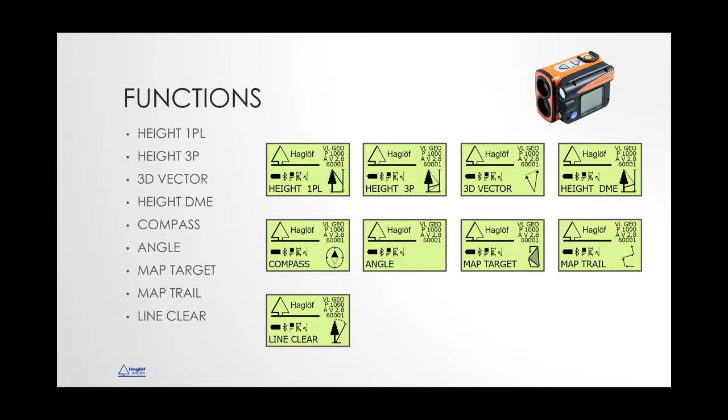Then we have the line clear function, and line clear is for the power line business, to know if a tree will fall on the power line or not. And then we have the delta height, and that is to know the straight line between two poles down to the maximum sag of the line. And these functions, the line clear and delta height, have also been in a special presentation before this.

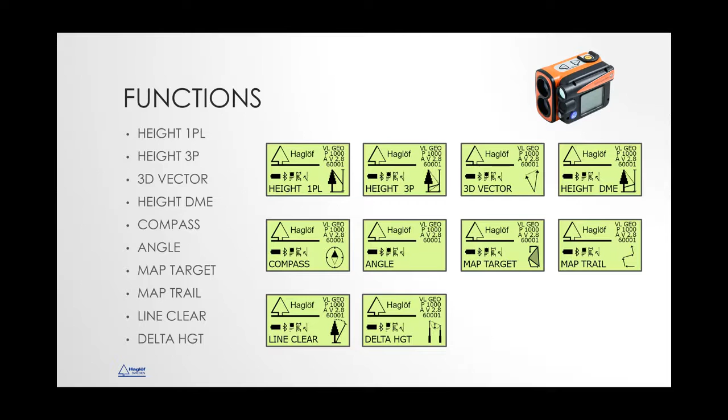So to explain a little bit before we go into the method, I want to mention how we have done in the background of this project, how to measure irregular piles of wood chip or gravel or anything like that, because it's very hard to measure. There are a lot of different things that the result depends on. And we started already 10 years ago a project with a customer of ours here in Sweden to try to get the volume of these irregular shaped wood chip piles with better accuracy and consistency.

But at the time when we started these tests, there weren't many good options, and many of the hardware solutions that were available for us to use weren't that reliable, and it was always about connecting different instruments to each other and so on, and we ran into quite many problems. But at that time we also made a project of measuring bigger piles of roundwood. So that's how that project also started. We have a solution for that as well.

But when we introduced the Vertex Laser and the Laser Geo in late 2017, that was at Elmia. After that, late 2017, 2018, we went back to the customer and asked if they were interested in a project trying again to find a way of measuring these irregular piles. And we started a project together with them, and we bought a drone as reference data, because we needed to know the result of the measurements to be able to compare.

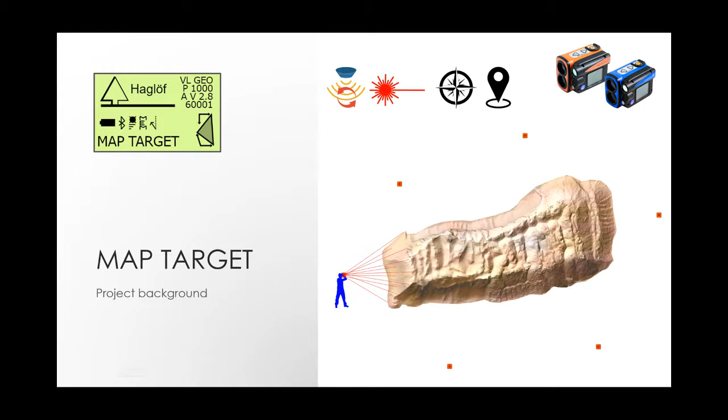Okay, so the method that we finally came up with after, I think it was about 6 months, was verified by our customer, the independent control measuring organization here in Sweden that measures all the timber at the industry. And what we found out first was that any compass should be tested, because a compass gets problems if you have metallic objects in the ground, or if you have your cell phone nearby in the pocket, or car keys or something like that.

And our compass can be calibrated, of course, and you can also set in the unit the magnetic declination for the area where you are. But we don't recommend just calibrating the compass, because we do a factory calibration here. It might be something else that is wrong with the unit.

So you see there also, in this project we have our own non-magnetic monopod. So we know that this is very important: if you use just any monopod, for example, there might be problems since the monopod itself is disturbing the compass. But the monopod we supply with the unit is non-magnetic.

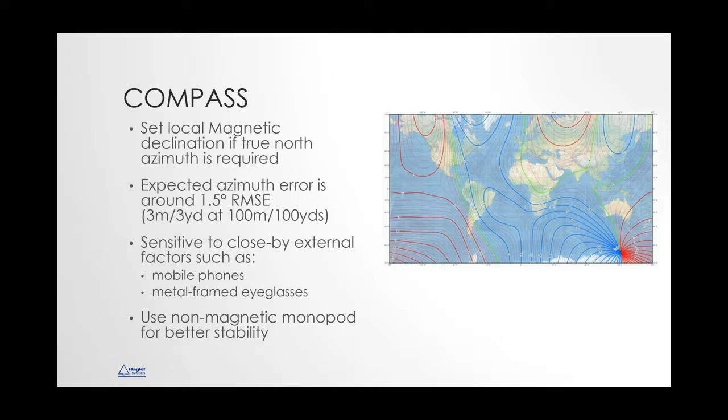But we developed a test function for the compass, and this just tests the accuracy of the compass at the position where you are. So how that works is that you measure in one direction to a clear target. You go to the test function in the settings menu, and you measure. And then you go to your target and you measure in reverse. And you should be, as it says in the presentation, 180 degrees plus minus 4 degrees.

Then you can say that, okay, the conditions to measure where I am are good enough. Then you don't risk that you do all the measurement and the data is crap. So this is an important thing that we found out. And you can also do these tests because it's very fast to do them. So you can do it a couple of times.

And how this method works then: first you come to the area, you test the compass, then you start planning your inventory, how you would like to perform it. If you see the pile here, you take a walk around and you see where you have to put your reference points. And I plan in sections.

So a section should not be wider than 90 degrees from my reference point. And I need to see my next reference point from the one where I'm standing. So these are the conditions for the planning. And then I just put out as many reference points as I need.

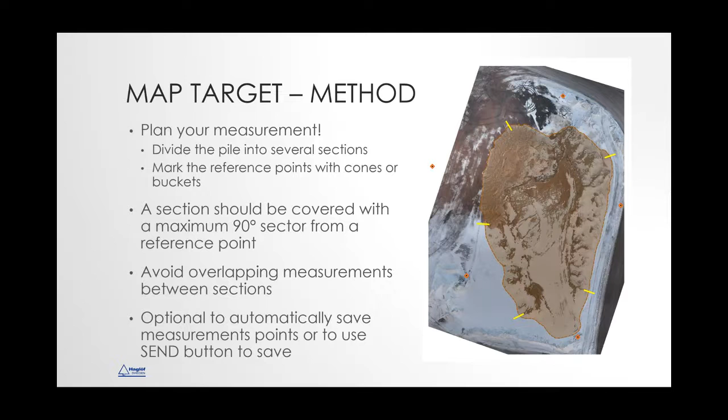So you put the cones out where you want to have your reference points and where you best can cover the target, and then you can start your measurement. So now I am at my starting point, my first reference point. And when I take my first measurement, this is the method that we found out from a lot of testing, was to start from left to right and to measure base points first.

So when I start the instrument and I want to start to measure, I will first aim on the left side of this section. You see the yellow line on the left where it goes down, that's to mark where the section starts. I will measure my first point, but then the instrument will prompt for a GPS position of my location. And this is only at the first reference point.

On the other reference point, it doesn't need a GPS position, and the unit actually doesn't need a GPS position at all to get the volume. This is just to show on a map where is the pile, but the volume will be the same no matter where in the world it is. So this is how it goes.

I measure, and it auto saves my measurements, and we say like 6 to 10 points, depending on how irregular the pile is. Then I aim about half a meter up, and I do my second line of points. And this is a kind of security line that we came up with in the method as well, because if I didn't take this point, we risk with the method to overestimate the volume, because actually the calculation that we use is called the nearest grid. It's a quite advanced mathematic form to calculate volume of irregular objects.

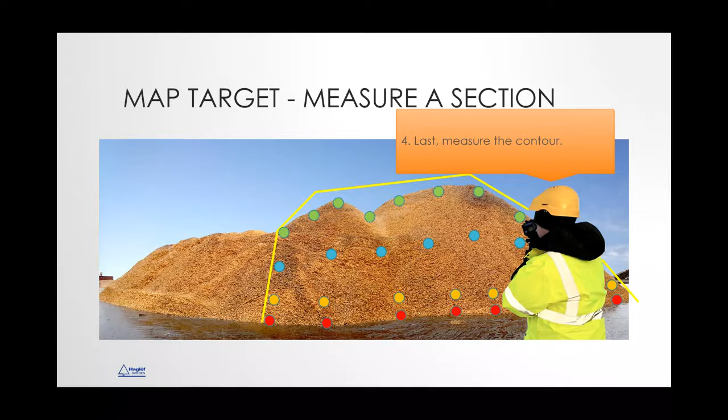Okay, so this shows measuring the section. And now you see to the left, you have your next reference point. I have told the unit new reference, and then I measure on the reference point, and we suggest to measure and get the same result 3 times for the distance, because you might risk to miss and hit the target behind, or it could be a car standing nearby that you hit or something.

And if you move to the wrong position, of course the data will not be correct. So I measure and I walk to the second reference point, and it's important to stand exactly on the point. So you move the cone and you stand exactly straight where you were measuring. And then you measure your third point. The same.

And the last reference point, cover with base points, and then the points on the pile, describing it as well as you can. And then finally you measure back to your starting point. And then when you press escape, you will tell the instrument that now I'm ready with the measurement.

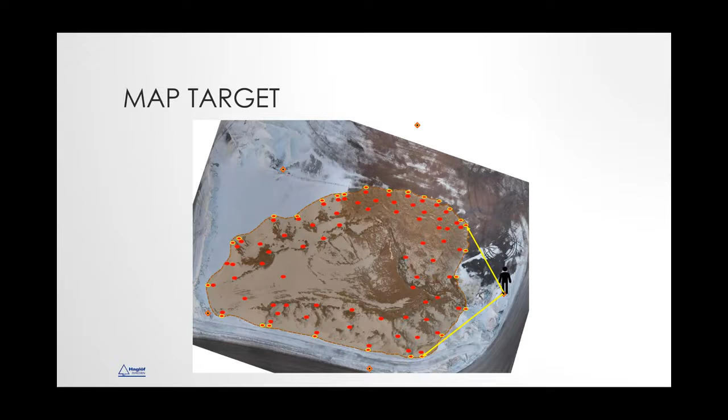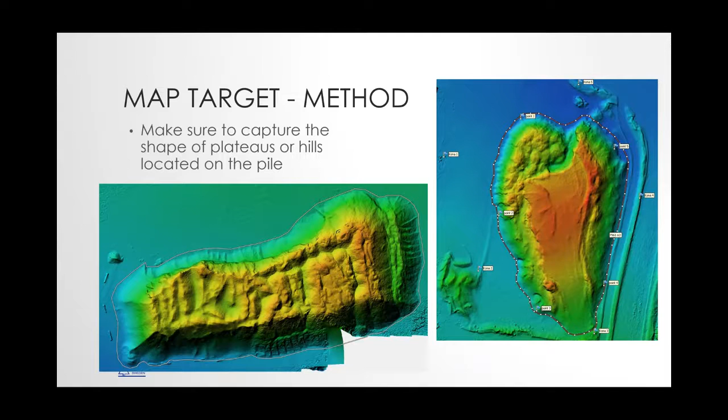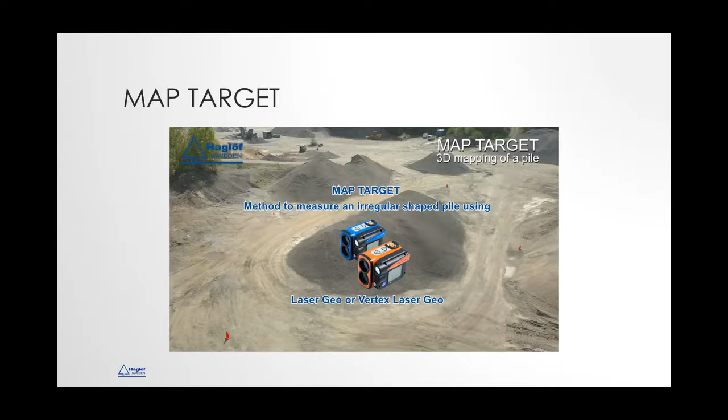And the pile you see to the right there is the one that was described in the data before with the drone image. You can see that the machine has been driving on the pile as well. Okay, so this was describing the method, how you should work, and it's important that you follow this left to right and so on. I was going to show a small movie about everything that I spoke about now to get a better view of what I was talking about.

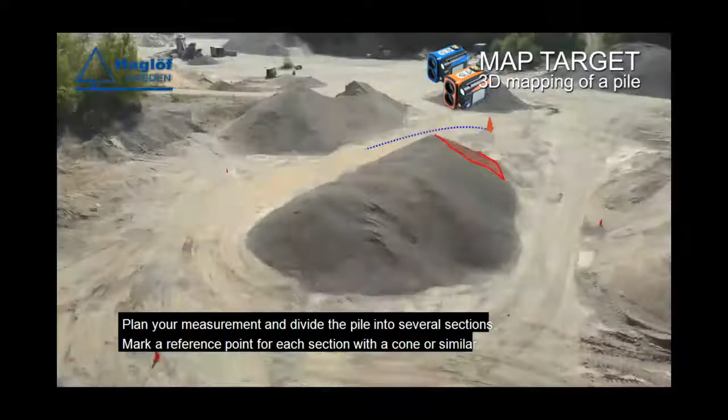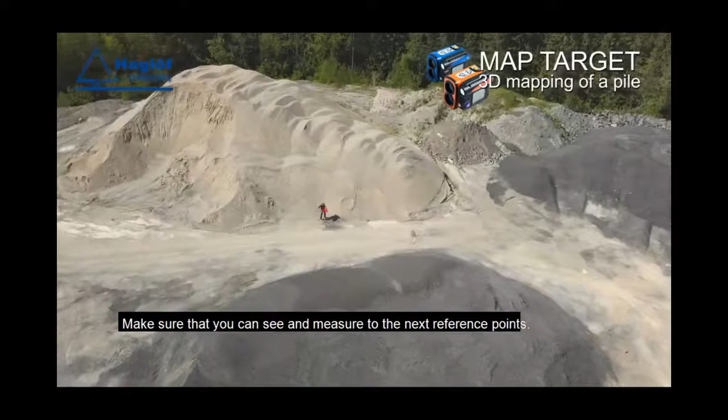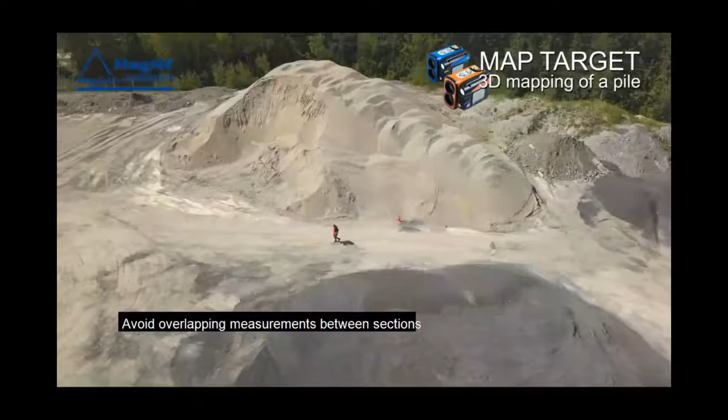Okay, so now the compass has been tested already to know that there were no conditions in the ground or concrete or something that disturbs the compass. I go out and start planning my inventory, putting the sections out so that you don't cover more than 90 degrees. You must see the next reference point from the one where you're standing. So that is also important.

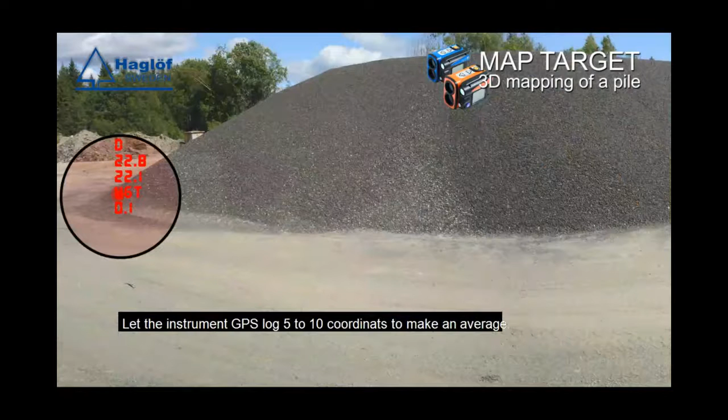And it's also something to think about, not trying to overlap. So what you cover from one reference point, you shouldn't cover from the next reference point. So now you're at the first point, measuring, starting to the left and measuring the first point, and it starts the GPS automatically and starts to log, and you see the number of positions and how many satellites are found. And then when you're satisfied with the data, you press to store the first point and your position. And remember, this position is only important to create the KML file.

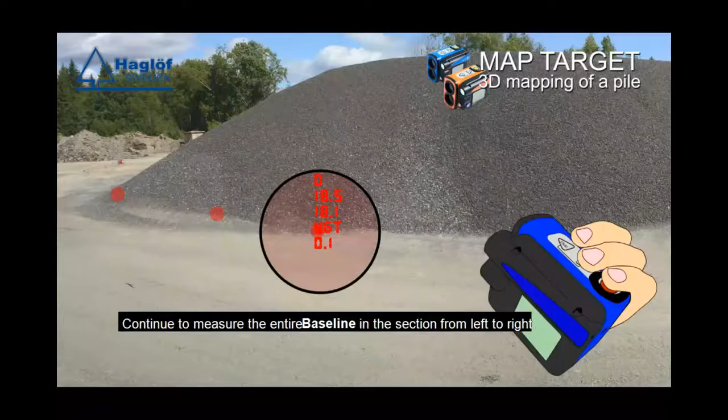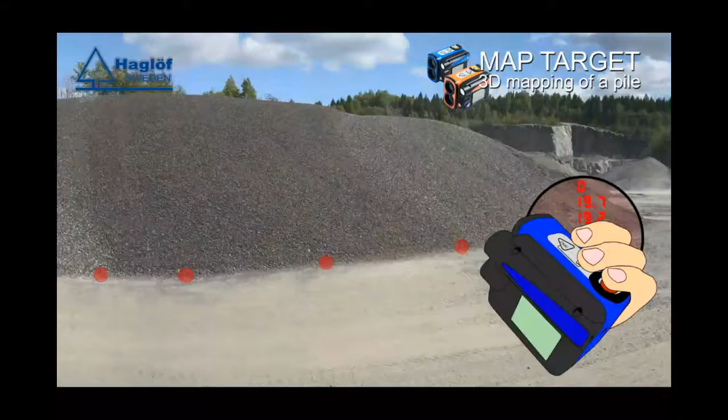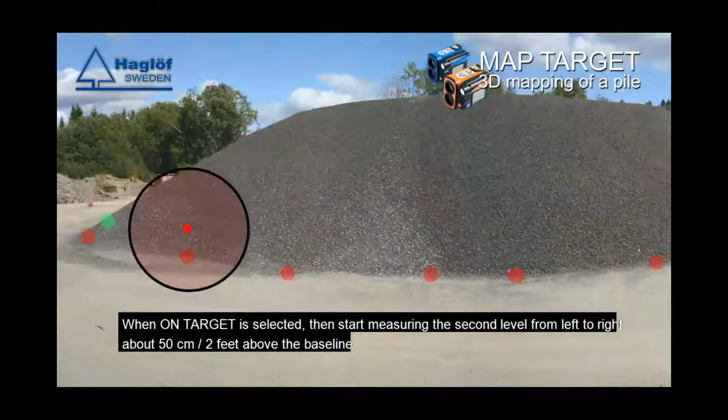Then you measure and autosave base points. And it goes very fast and smooth, and depending on how irregular the pile is, you should take more or less points. Then you press escape to tell the unit that now I'm no longer measuring base points, I'm starting with my points on the pile. And this is because it should calculate the base area from the base points.

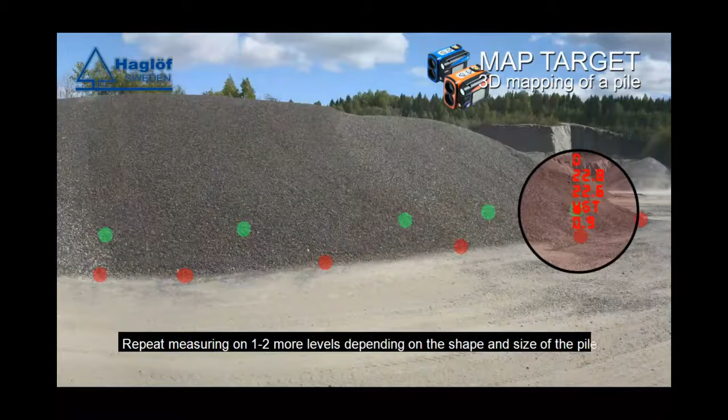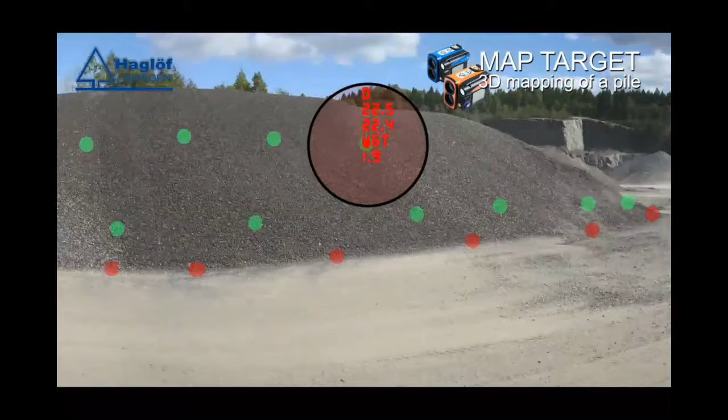So you measure your security line at about ½ meter. It's not important that it's exactly ½ meter. It could be anything nearby there, but about ½ meter. And in this case, a third line, where the pile changes, and then the top contour is measured. You see the result in the scope all the time.

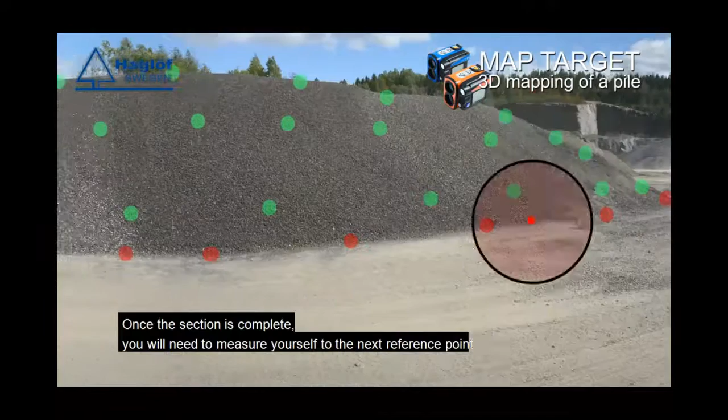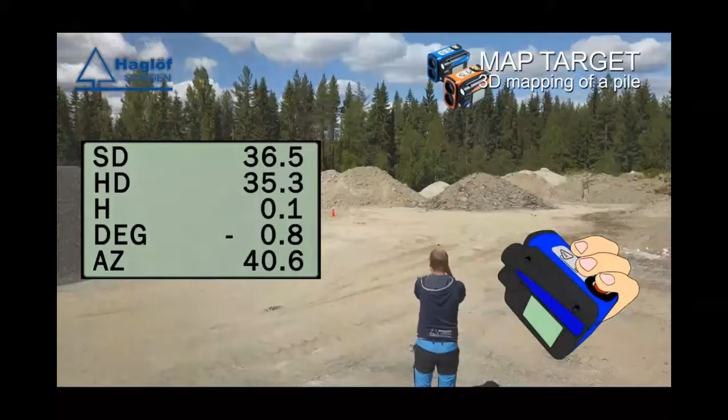Now the section is ready, so you should move to the next reference point. But first you press escape to tell the unit that now I am ready with my reference point. Aim at the second reference point and repeat 3 times the result, aiming at the base of the target. Here it's important if you're, for example, 2 persons and 1 person is the target, then you should aim at the feet and not high up on the shoulders or something, because that will actually destroy the data.

Then you would need to stand on the shoulders of a person on the second. We did that at one of the testings. We had customers that used each other as targets, and that is not recommended. So always shoot at the feet.

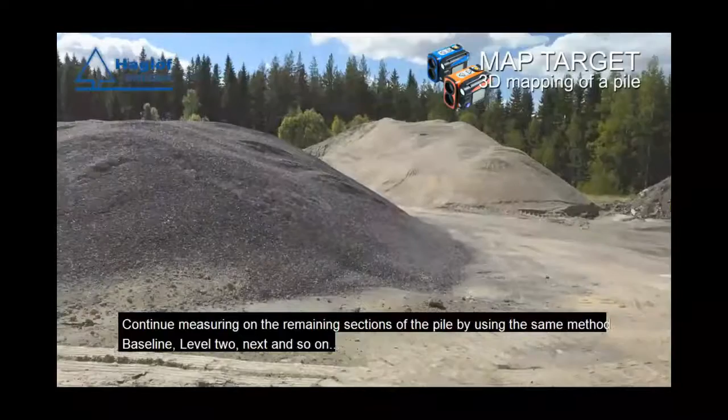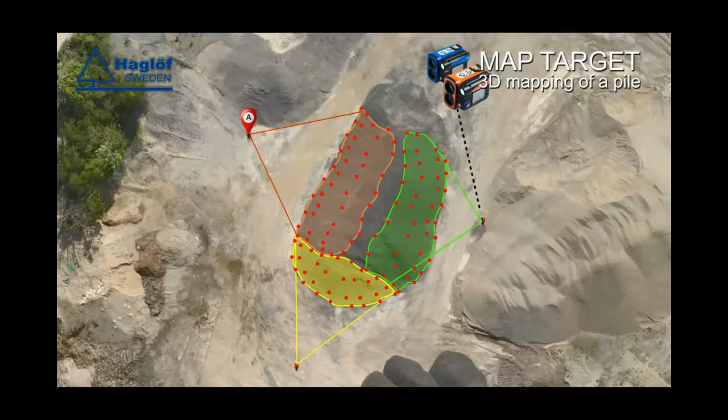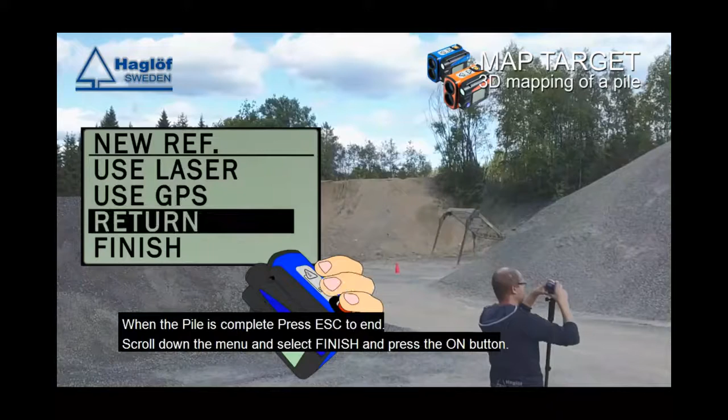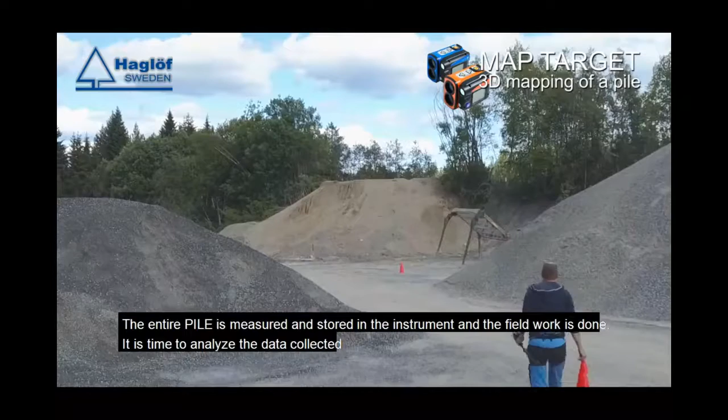So I am at my second reference point. I measure from left to right, not covering more than 90 degrees, and I try not to overlap. Measure my second point, my third point, and so on, until I have covered everything. And then in the end, I measure back to my starting point, my first reference point. And then I escape and go to finish. And now I'm ready with my measurements. So now I have all the data stored in the Geo for this pile.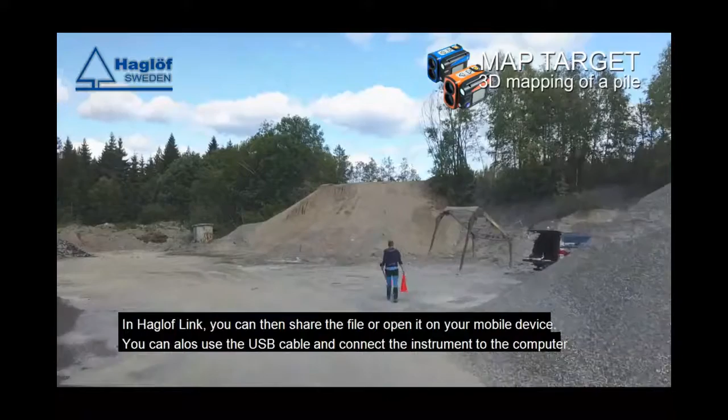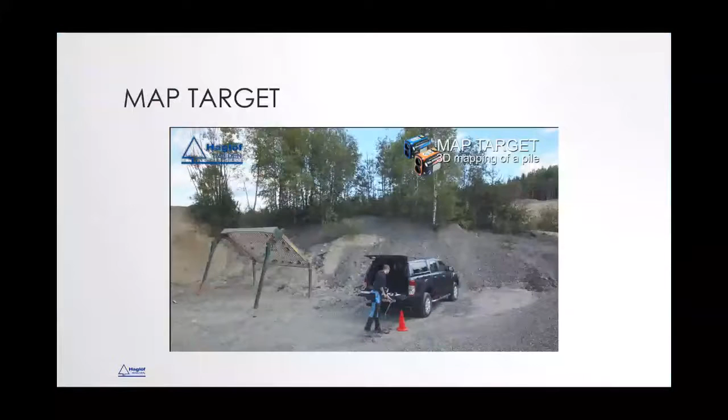To see the result now, I can see it actually, and this is what I talked about earlier in the project. One of the problems we ran into with the drone, for example, was that you couldn't immediately know if the data was correct or not. Here we have our possibilities. We have the Haglöf Link, an app that is free for download on Google Play and App Store, where you can take the files directly from the Geo. And the Geo, as you know from previous presentations, stores a KML file and a CSV file.

The KML file is used to show on a map, and the CSV file for all the calculations that we are doing. But you can easily then, over the Haglöf Link, take the files out. And I will show a film of how this works. And also we have a cloud solution for this called Pits and Piles that Haglöf offers. And this is a new thing that we have now. So, short film.

First of all, you have the app that you download, and then you go to handling the files and start receiving the data. And in the unit, once I have the device connected, I go to the settings.

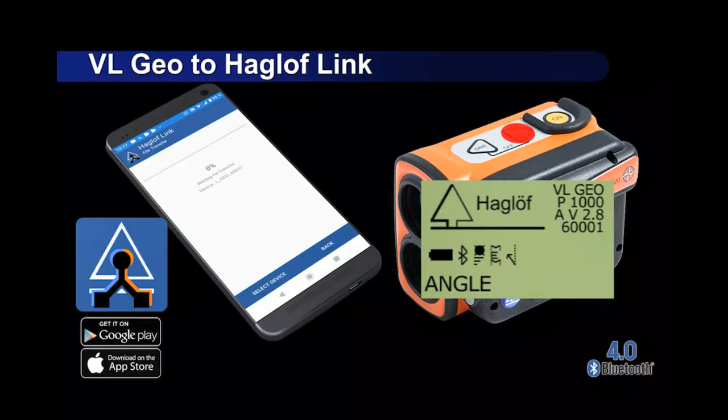And I scroll down to send files, and I press on in the unit, and it will start to transfer my measurements. And imagine now you can still be standing there by the pile with this solution. Then I have my files, and they are sorted in this case by date, if I have a lot of data in the unit.

So I take my KML file, and if I have Google Earth, I select that, and it will automatically zoom in on my measurements. And from this, you cannot see the volume or things like that, but you can verify that it looks good and you have no errors. It looks good, but to really be secure, you need to upload the CSV file.

In this case, if I have the Pits and Piles solution and an account there, I will upload my data to Pits and Piles. I give it a name of the file. And just to mention also that the next presentation we will have will be around this solution, around Haglöf Link and our cloud solution Pits and Piles, more deeper in details what you can do and so on.

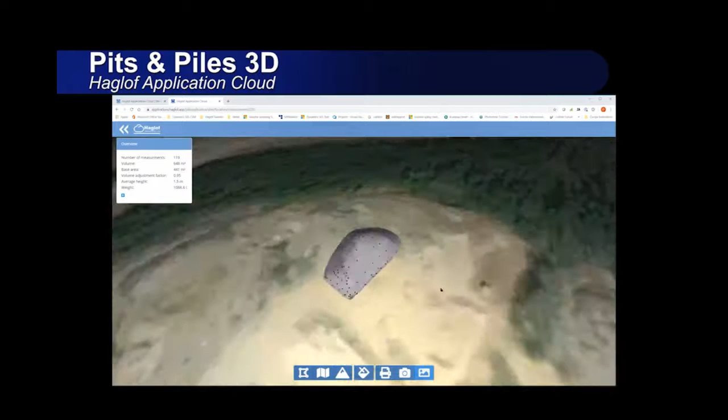And this is my measurements, and you see there is something that looks really strange. I clearly missed one of the top contours and hit the tree in the background, but here you don't need to worry. It's very simple to erase a point and to correct the data. So in this case, zoom in, find the point that is obviously wrong and take it away, and boom, I have a good shape that looks like the pile was looking.

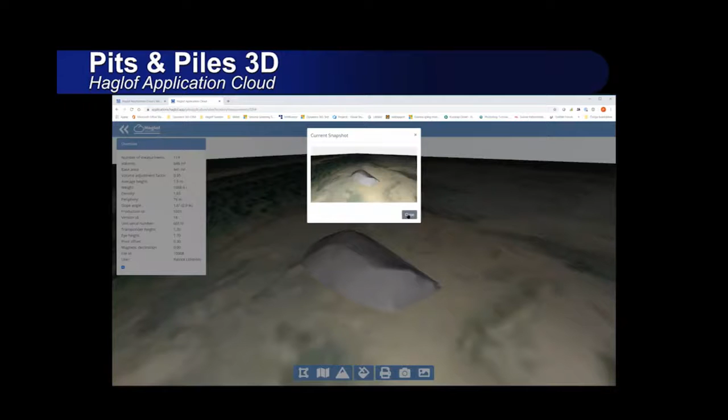And here also you see you can do some things. You can change the color of the pile, for example. You can look at your measurements, set some calculation, the factor you can set. You can take a snapshot of the current view and create a report from that, and we supply a standard report here.

Okay, so this was what was planned today. I hope you found it useful and that it wasn't too much information for you to take in. I think the method that we have is very hands-on and very easy. But you need to test it and to go out and do it in the field, of course.